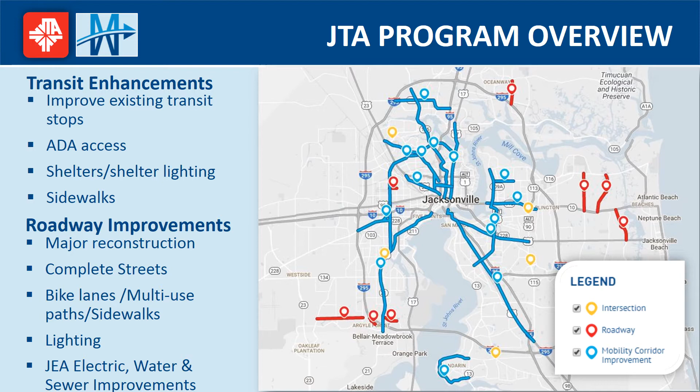The project is part of the JTA Mobility Works program that will provide roadway, complete streets, mobility corridor, and transit enhancements throughout Jacksonville. The JTA Mobility Works program is funded through bonds issued against the extension of Duval County's local option gas tax.

This project is one of 5 Complete Streets Keystone projects. This section of 8th Street is a Florida Department of Transportation state road and will require a permit prior to starting construction. We encourage you to visit our website at jtamobilityworks.com for more information on this and all our projects.

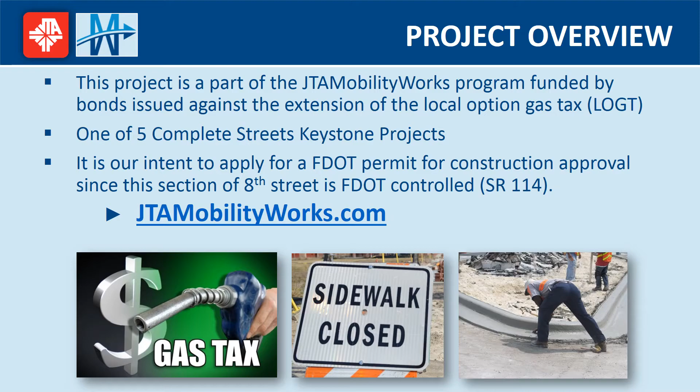The scope of this project includes milling and resurfacing the intersections, restriping lanes and crosswalks, as well as some curb ramp, median, and sidewalk construction to improve pedestrian, bicycle, and vehicular accessibility.

As part of this project, JTA is replacing a 12-inch water main between Francis and Boulevard Street for JEA. Special care will be taken to ensure there are no service interruptions during construction. Property owners will be advised on upcoming work as needed.

The major objectives of the project are to reduce pedestrian accidents and delays, provide accessible and safe routes to transit facilities, and provide operational improvements for better vehicular, bicycle, and pedestrian traffic.

The benefits of these improvements also include improved safety and mobility for all users, reduction in vehicle delay, improved access to adjacent neighborhoods, bicycle facilities, and better livability for the residents while accommodating the significant traffic that uses the roadway.

West 8th Street at Payne Avenue is an unsignalized 2-lane road with an existing multi-use trail crossing, the S-Line Rail Trail. Traveling east under I-95, 8th Street widens to a 6-lane section with center turn lane medians.

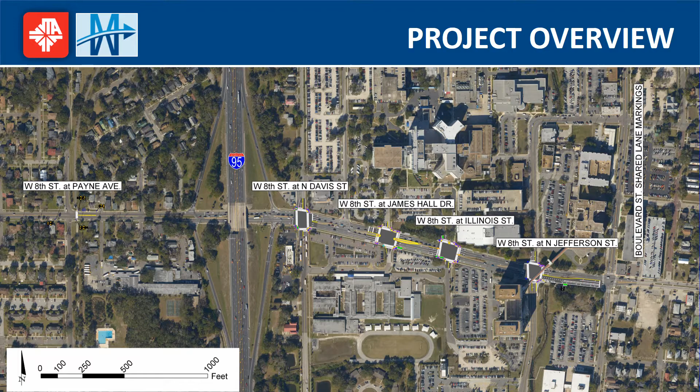This image shows the proposed improvements to the Payne Avenue intersection. The crosswalk is being restriped to include special emphasis markings for higher visibility. In lieu of separate signs for bike and pedestrians, a trail crossing sign with rectangular rapid flashing beacon is being proposed. This assembly uses a rectangular flashing light to warn drivers to stop when pedestrians press a button to cross 8th Street.

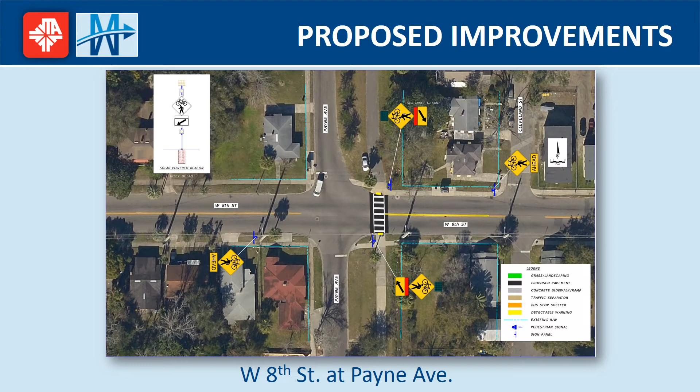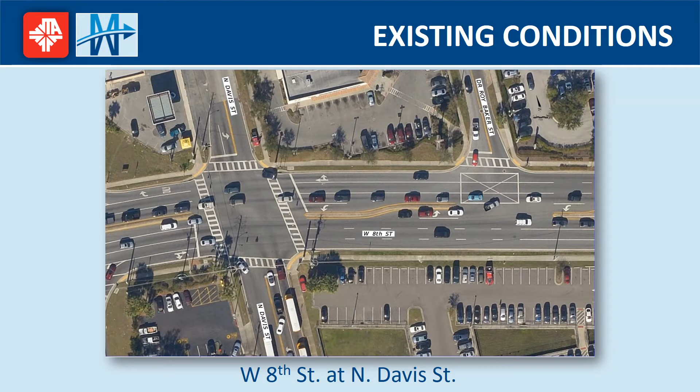The intersection at North Davis Street in its existing configuration has skewed crosswalks. The skewed crosswalks require more time for a pedestrian to cross the intersection.

The proposed improvements at North Davis Street include removing the skew from the crosswalks. The crosswalks will be shortened, providing safer access for pedestrians. This intersection, along with the following intersections, will be milled and resurfaced to the limits shown. New pedestrian signals will be added when necessary to ensure they are in the proper location with respect to the relocated curb ramps.

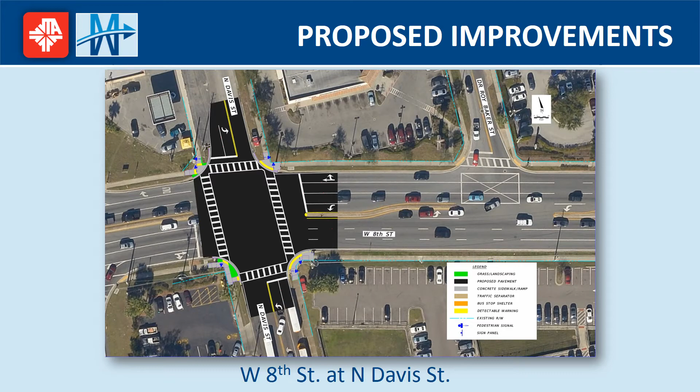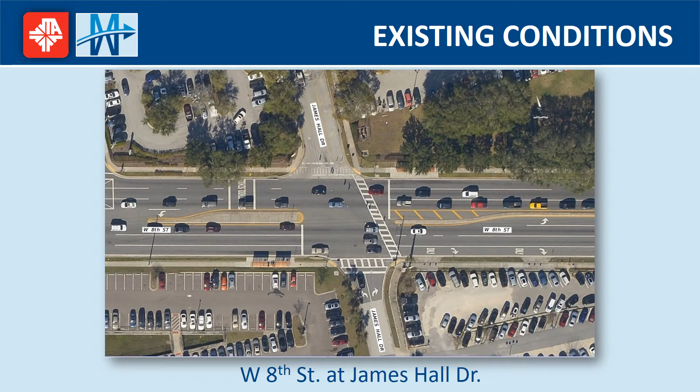The James Hall Drive intersection contains traffic separators in place of left turn lanes, since 8th Street traffic cannot enter James Hall Drive. There is only one crosswalk for north-south pedestrians, and it is heavily skewed. This intersection contains two JTA bus stop facilities at the northeast corner and the southwest corner of the intersection.

The proposed improvements to the James Hall Drive intersection include reconstruction of the traffic separators, an additional crosswalk, and removal of the skew of the existing crosswalk. The existing traffic separator on the west side is being altered to have a pedestrian refuge area to allow for safer crossing through the new crosswalk.

This required a new curb ramp configuration at the southwest corner. To avoid impacting the existing JTA bus stop, the facility is being shifted to the west. The same applies for the northeast corner.

This separator on the east side is being reconstructed from a 4-foot separator with stripe median to an 11-foot concrete separator with curb and gutter. This allows for the construction of a pedestrian refuge area serving the realigned crosswalk.

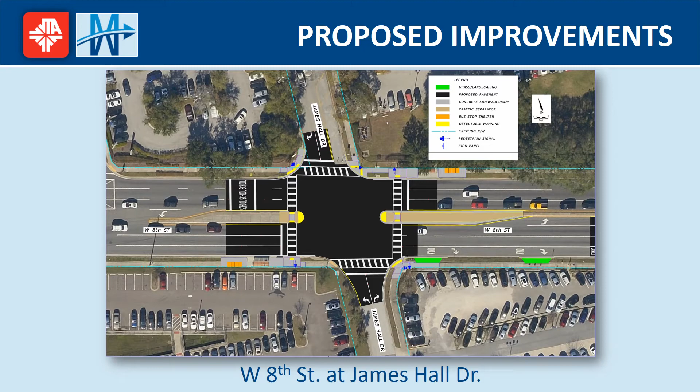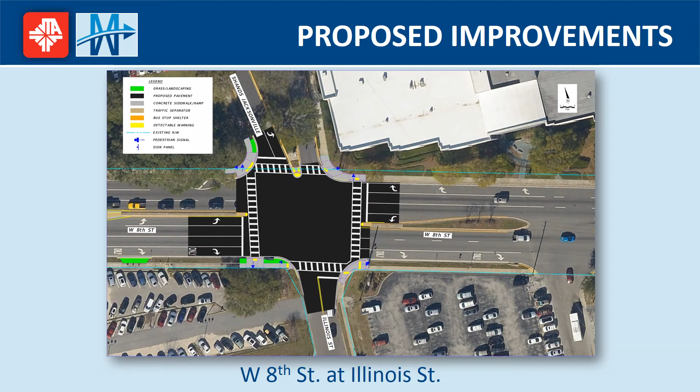This image shows the proposed intersection of 8th Street and Illinois Street. This skew on the crosswalks is removed, reducing crossing time. The 4-foot traffic separators on both the east and west segments are shortened to allow the crosswalks to be placed in this configuration.

The North Jefferson intersection serves UF Health. The stretch of 8th Street between North Jefferson Street and Boulevard Street contains 3 eastbound lanes with dedicated left and right turn lanes. There is also a striped buffer area between the right turn lane and the curb.

The west segment of the North Jefferson intersection contains a right turn only lane, which is aligned with the striped buffer area east of the intersection. This configuration does not prevent drivers from wrongly continuing through the intersection from the right turn only lane.

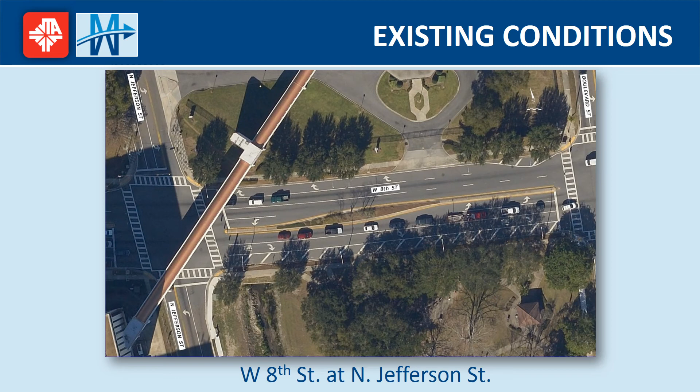The improvements at North Jefferson Street include realigning the crosswalks and curb ramps for pedestrian safety. The eastbound lanes between North Jefferson and Boulevard Street are being realigned to include a bike lane between the right turn lane and the through lane.

The curb in the southeast corner of the intersection will be reconstructed to prevent the eastbound right turn only traffic from wrongly continuing through the North Jefferson intersection. A bike ramp will be added to allow bicyclists to enter the bike lane. This provides a connection to the proposed shared lane markings on Boulevard Street, which eventually lead to the S-Line Rail Trail, a third of a mile north of this intersection.

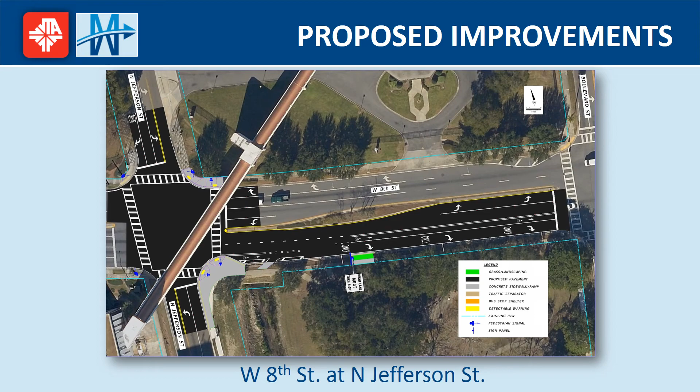The benefits of this project include better and safer access for pedestrians, bicyclists, and vehicles. With the addition of new and realigned crosswalks, there will be safer and more efficient access to the medical facilities, educational facilities, and public transportation facilities in this area. With the proposed reconstruction of curb ramps to meet ADA requirements, there will be safer access for handicapped persons as well. This project also involves improved utilities in the area.

Production of the roadway plans began in early 2018, and the final roadway plans will be submitted at the end of this year. Construction could begin in spring 2019.